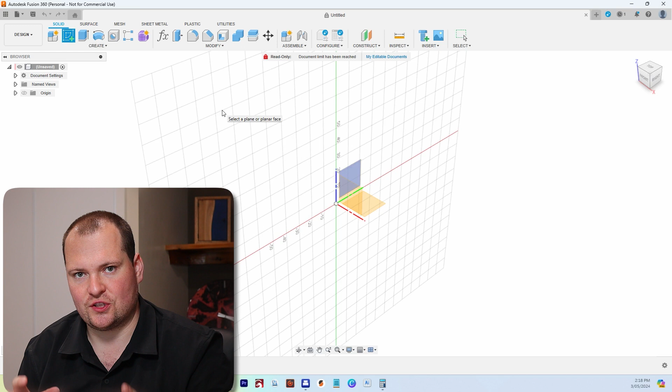Okay, so you're in Fusion and you've got a new workspace open. What you want to do is go up here to create a sketch. I'm going to be going through this relatively quickly if you're not familiar with the basics of Fusion 360. If you want to know more about it, let me know in the comments below and I may do a series on the software itself.

Okay, so new sketch up here and we are going to go on the bottom plane there. So we're drawing from the top, circle. We're creating a circle here and we're going to make this 300 millimeters. So that's our circle there.

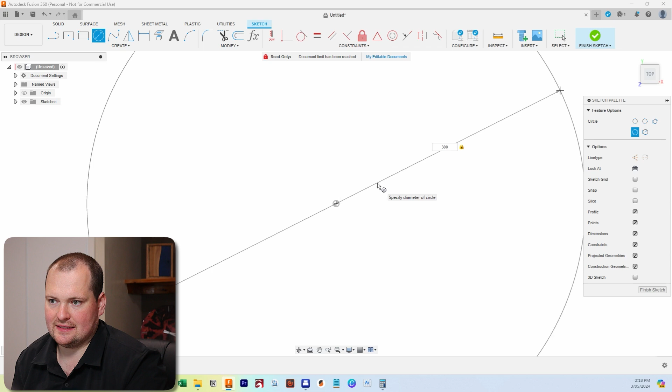Now the next bit of important information is because we're making this to house a ramekin, let me grab a ramekin. An organized individual would have had that ramekin handy, but that's not me, so apologies. The ramekin sits inside said groove. You need to make sure you know what ramekin you're using and how big that ramekin is.

So I'm just going to grab a measuring tape, measure that one up. I'm in an office, so I'm going to use a ruler, but measuring tape works just as well. So we are roughly 90 millimeters. So we're going to make our size 90 millimeters. That is a relatively standard size. So we're going to hit C for circle, and we're going to make that 90 millimeters.

If you don't want to use your keyboard, you can use these up here, but I highly recommend you learn the shortcuts. It speeds up the workflow astronomically.

And now we're going to throw in some offsets. So basically, we've got our inside dimension here and our outside dimension. That's what we've got on the screen there. We need to offset that to give these upstands. So in our case, we're going to go 10 millimeters.

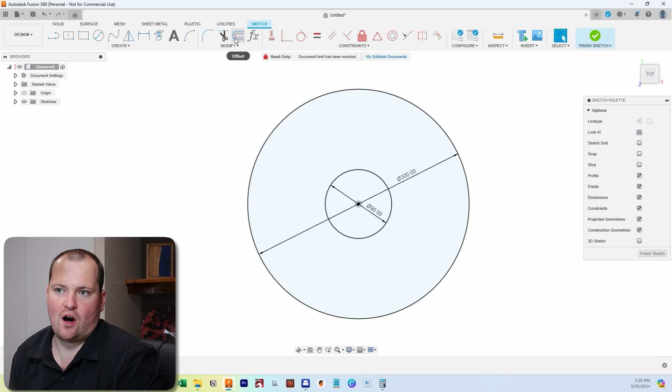So up the top here, you've got this offset tool. Click on that, select your circle. We're going to drag outwards of the center. We're going to make that 10 millimeters. We're going to do the same thing, but we're going to drag inwards of the outside circle. So we're going to need to make that minus 10 millimeters. That gives us our offsets there.

Now, all we need to do is add our dividers. You can do 4, you can do 2, whatever works for you. I'm just going to mimic this and we're going to do the exact same thing. So you're going to put in a line. Now basically we need to put a cross in to then give us our offsets based off that line.

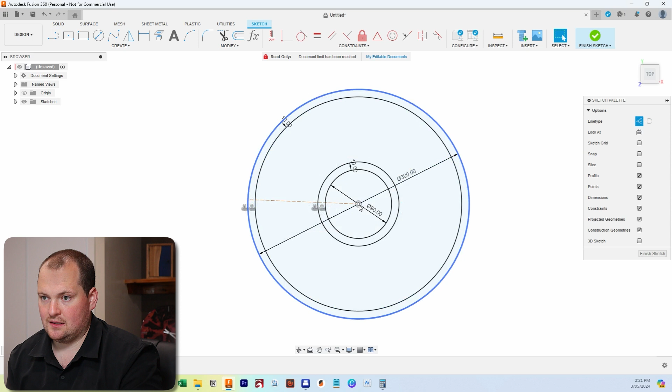In all 4 directions. Now you can see there, I'll zoom in for you. See how our lines we made earlier are solid and these are dotted lines? Those dotted lines just represent the fact that they can't be extruded. They can't be used within the model other than as a reference line.

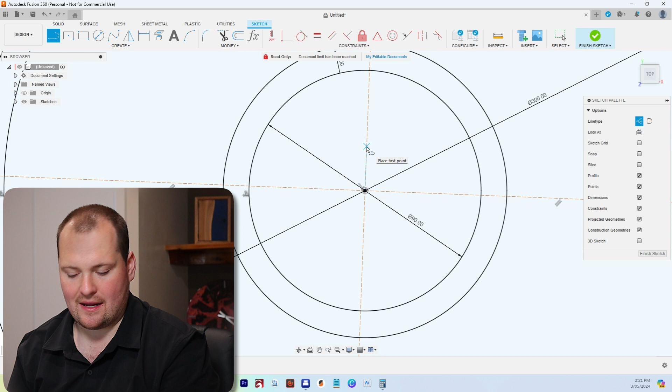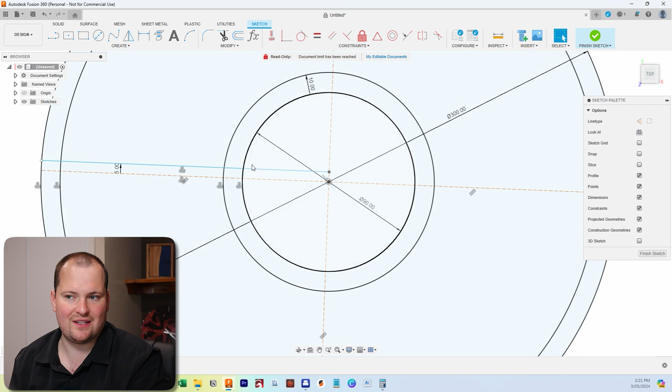So now we're going to push X again, because see here, we're still selected as a construction. If I hit X on the keyboard, it then takes that away. Now when we use our offset tool, back up top, we're going to offset off these 5 millimeters. If you didn't take off construction, that would be a construction line and you wouldn't be able to reference anything off that again. So we're going to do the same thing here.

We are going to offset minus 5, and we're going to do the same to all of the lines we just made.

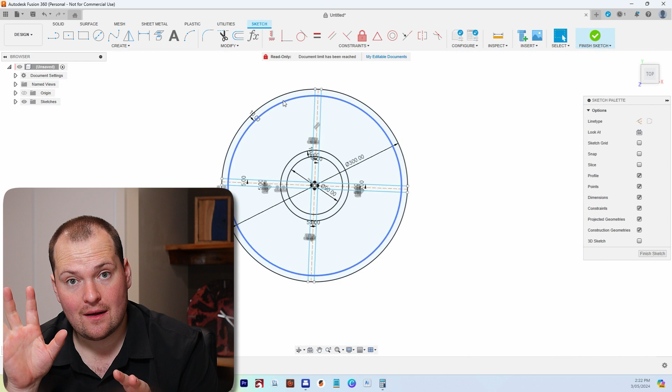Okay, so effectively that there is our sketch. Now this is where you can complicate it as much as you like or make it as easy as you like, depending on what you're trying to achieve. We can now extrude straight off that, or you can go ahead and make all of your fillets, so your rounds in your corners.

But the reality is, when we cut this out... if I can get this bit out without cutting my fingers up. One eternity later, got there.

We're going to use a bowl and tray bit, that's what I know it as. I don't know if that's its technical name. According to Timbecon, it is a DC-318H bit, but bowl and tray bit - so effectively this gets used for bowls and trays. Fancy that. But you can see that the corners are rounded and the edges are rounded.

So naturally, when we set up the G-code based off this bit, it will automatically do all of that in the software itself. The only reason you would need to do it in the software currently is if you wanted to see what it's gonna look like. So you can take the time, it's gonna add a bit of work to your workflow, or you can just punch it out based on that.

So in this case, we're just going off that because we just want to show you how to actually achieve one of these bad boys. Okay, so we're gonna now click up Finish Sketch, and then you now have everything to work with. So we're gonna extrude this, extrude.

So we want to select it all. We're working with 20 mil thick timber. We're gonna make a 10 mil base and then 10 mil cutout. So from that, we're gonna extrude down 10 millimeters and up 10 millimeters, so minus 10, that gets us our solid base. So there is our base.

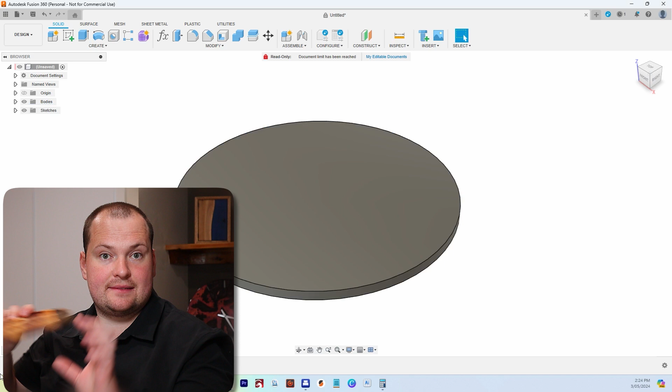Now, whoops, knocking stuff over left, right, and center here. So we want to turn that sketch back on so we can see it again.

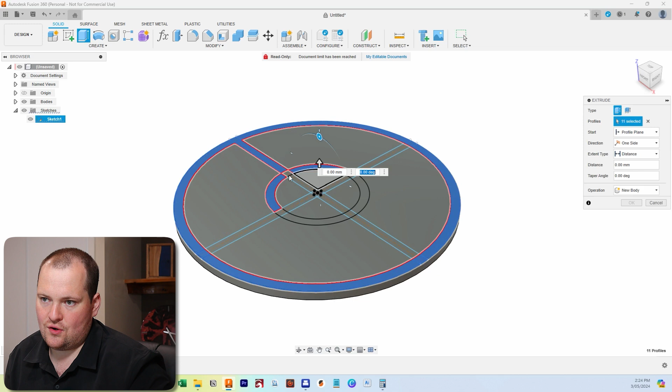Now, hit E, extrude. So we're going to then pull up everything we want to be pulled up. So we're just going around and selecting all of the bits and pieces. And we're not - whoops, that one we don't want. I'm not doing a very good job of this.

Okay, notice here, I'm just going to zoom in for your knowledge here. That's where that construction line is. I can't select either side of that line. That's what the construction line's for, it's just a reference point. Can't use it when you're actually modeling in.

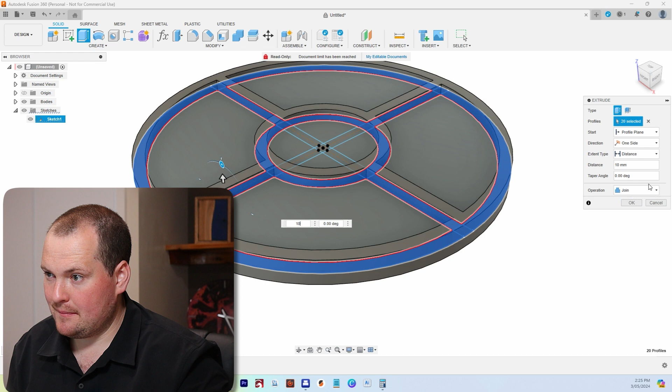Okay, so we are then gonna pull this up 10 millimeters, and then we wanna make sure the operation is join over here. I believe that's the default - might be different for everyone, but join is what you're wanting. And then we can turn off all of our sketches.

Bang. Now, theoretically, we have a 20 mil high wall here, 10 mil step down, 10 mil step down, 10 mil step down there. Again, you could go through and throw a fillet on the inside to represent what you're actually gonna have, but not required - it's gonna naturally do it anyway.

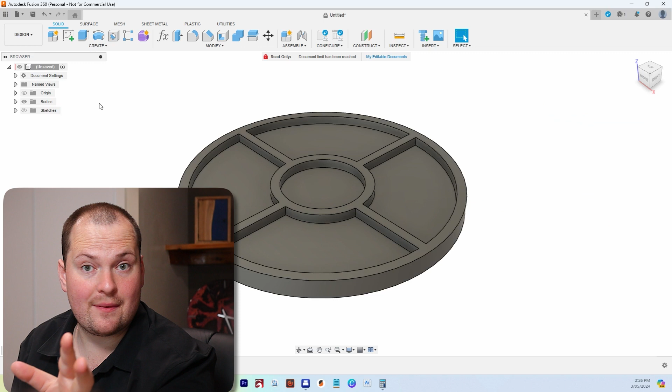And there we have it, the tray is made. That is exactly what you need to then go ahead and cut one of these bad boys out. We can jump straight into making the G-code based off this, which we'll do in a second.

But I'm gonna quickly open up one that I have made and show you what a tray could look like if you took the time to color the tray, put in your fillets, all your roundovers, everything like that, so you can see what a finished product would look like.

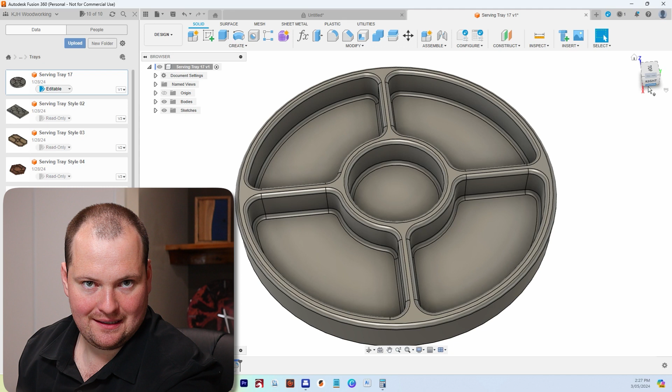You go, I don't have it colored, but this would give you an idea of what it's gonna look like if you went through, put on your roundovers, because we're gonna round it over naturally, and whatnot. And then I haven't actually got a fillet in there, but if you put in a 3 mil fillet on all of these, that's gonna give you a good indication of what it's gonna look like. But you do not require to do that for actually making it - you can simply use what we're going to use, the stock standard base shape.

You're gonna go ahead and save the model in case it crashes, so we don't have to do that again. You can save it wherever you like, but I suggest making some form of orderly saving system. I'm gonna create a new project and call it YouTube videos, otherwise I'm gonna get really confused really quickly.

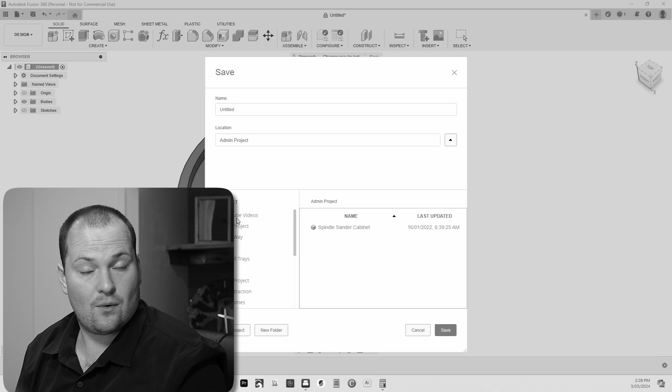So we've been doing this in the design space. See up here where it says design, you can change your workspace to manufacture. This is where we go and make the G-code for the CNC, which effectively is the code that runs the machine. A few things you're gonna need to have set up is your machine within the software. We're not gonna do that today.

A few things you need to have set up is the CNC machine that you're using in the software. You need to set that up. I've already done that for my machine, so we're not gonna be doing that today. But if you want more information like that, check out the playlist down below, it's all things CNC, runs you through everything. And if you want more specific information, feel free to ask. More than happy to assist and impart some knowledge where I can.

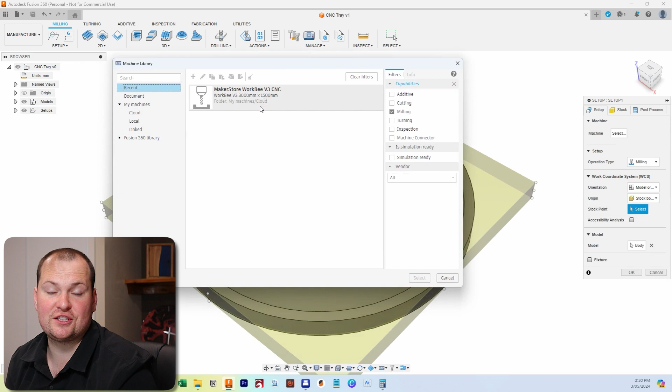Okay, so first thing we're gonna do is create a new setup. The setup is effectively setting up the stock and selecting your machine. So we're gonna select our machine over here, I'll drag that over so you can see what I'm actually doing. We're using a MakerStore WorkBee version 3 CNC, so logically that's what I called it. Really creative - I could have called it my CNC because I only own one.

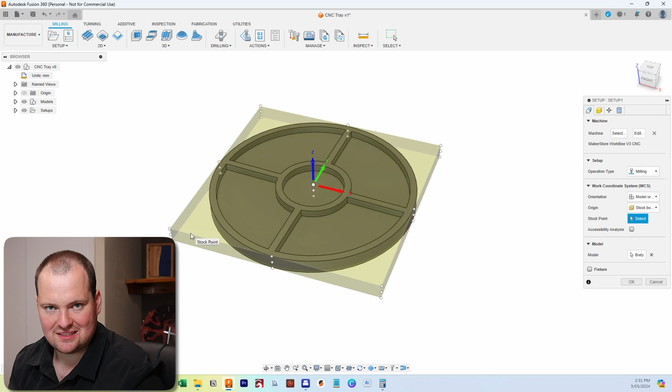See how the axis is set in the center? That's not how I operate my CNC. I always set mine up as the top left point because I have a workbench where I can butt everything into, and it's like a reference point. It makes it really easy for me to set things up, but you can work with what you've got. So I'm gonna select my stock point as that corner.

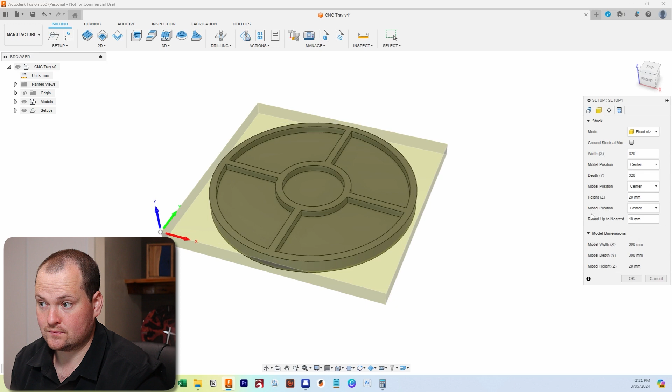Then up the top, we're gonna go across to stock. You've got a couple of options here: you can make it a fixed size, so measure the piece of timber you're using, or make it relative to the model you're using. I am gonna use a fixed size because I know the timber I'm using is 320 by 320, 20 mil tall. So that's the size timber I'm working with, so if I plug that in, it's always going to be correct. But you could make it 20 mil bigger than the model you've made - up to you how you want to work it. And then we're just going to hit OK, and that is our stock setup.

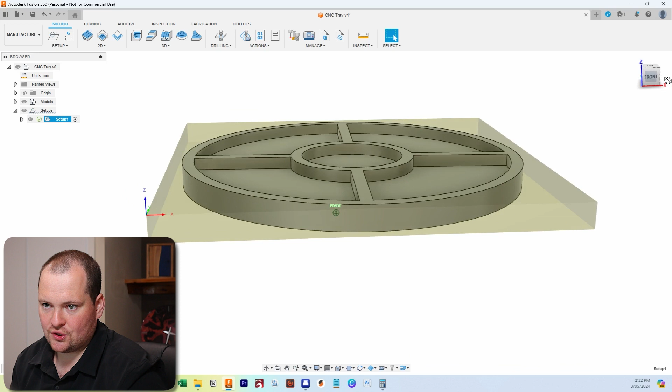So the stock is represented by this yellow shaded bit here, which shows you what is actually getting cut out. Now we're going to go ahead and make our cuts, so we're going to use two bits here: a cutting bit and then the bowl and tray bit, which we had right here. The one we're actually using in the CNC has a smaller shaft - I just ordered this one first and realized it doesn't fit in my machine, so I had to order another one. Live and learn, make sure you buy bits that fit your machine.

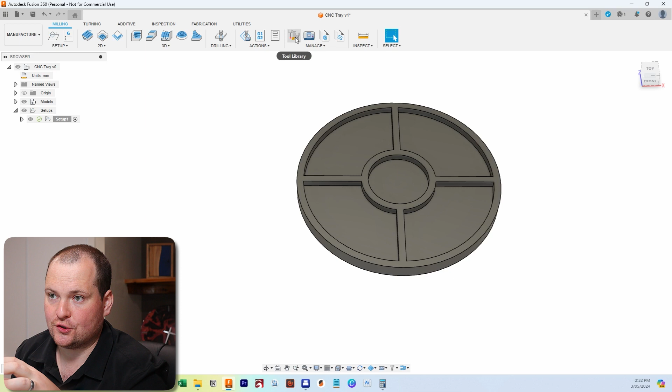So we're going to have to go and add those bits in. We want to go over to manage your tool library, and again I'm going to drag that over so you can see what I'm doing. They are both Torquata bits. As you can see, I've added some of those bits in here, but we'll show you how to add a new bit, so we're going to go new tool.

We're going to select the type of tool. So I am using - I'm so going to slice my fingers up doing this.

Timbecon, can you make these easier? Easier to get out of the damn boxes. They're really well packaged. I'll be back. Need pliers. I'm back with pliers. Now you're using pliers to get it out. Don't grab the blade.

Hey. So, we are going to set up this bad boy here. A couple of ways you can do this. Depending on the bits you've bought, you may be able to find all of the information online. Some companies will actually have a CNC downloadable file that you can plug straight into Fusion. Other companies don't, but it's really easy to set them up.

I'm going to use a really accurate wooden ruler because that's what I've got in here. I would highly suggest you use calipers to get as accurate as possible, because the reality is once you've set up this bit, if you buy the same bit every time, you don't have to set this up again, you just select the bit. So we're going to jump on Timbecon's website and we're going to do a little search for this bit. So you got the bit number there.

Oops. Can you see that? Yeah, my gosh.

So I can search for that bit. So we're just going to go SCD-064-Q-3-F. And here we have it here. So we're now going to look down here to find the one we're looking for. SCD-64Q. So this is this bad boy here. So we now have all of the information we need. We have the shank size, cutters, the cut direction, cut diameter, cut height, overall length. So we can go through and plug all of that information straight into Fusion.

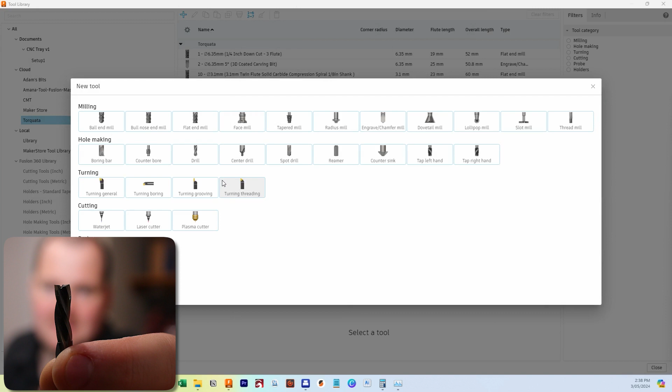So we're gonna select, it's a flat end mill. As you can see there, the end is flat. So flat end mill. So we're gonna select that. Description. Logically, call it something so you know what it is called when you go to buy it again. Then you put in the vendor. I bought mine from Timbecon.

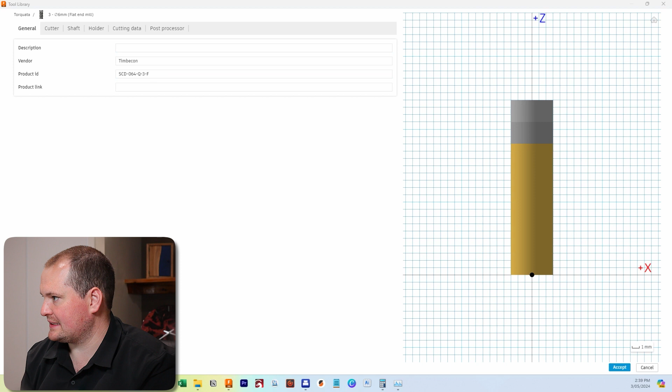So I put that in the wrong field. Good thing I copied that. So I should have put in the top section this bit of information, which is straight copied and pasted from the Timbecon website. And then I'm gonna go ahead and delete and rename to what my actual bit is. So mine is the 1/4 inch, so I'm getting rid of the 1/2 inch shank. It's triple flute. All that is still the same.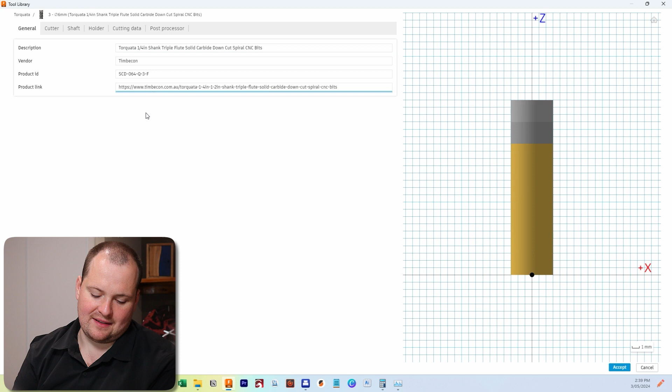And then we are gonna copy and paste the product link, because the reality is bits wear out over time. Sometimes you snap them. You wanna know at a quick reference, when you buy another one, how do you get it? I don't wanna have to think about this. I just wanna get it done. We're gonna go over to cutter. Plug in the information. We're working in millimeters. If you're in America, you will not be working in millimeters, but I am. I'm in Australia, so I'm working in millimeters.

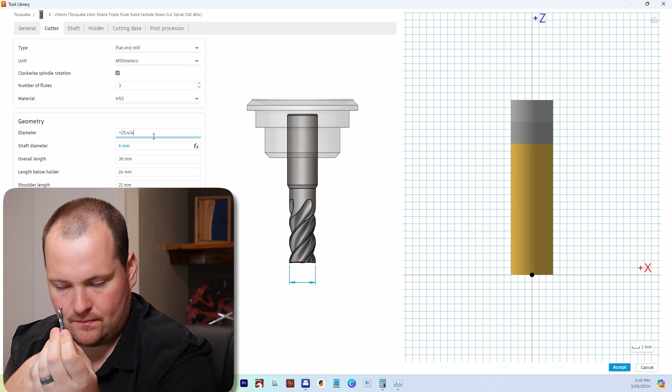So other cool thing about this is Fusion basically does maths for you. So I'm not gonna go and work out and put in what a 1/4 inch is. I'm just gonna go equals 25.4 divided by 4. So an inch is 25.4. If you work on 25, you're wrong. In reality, 0.4 millimeters doesn't matter, but in the CNC world, 0.4 millimeters matters. Because if you make this 25 divided by 4, a lot of people, particularly people that aren't in the woodworking realm, and a lot of beginners will go, oh, an inch is 25 millimeters.

It's 25.4 millimeters. Issue with that is if you went 25 millimeters, say this bit cuts up and back 100 times through this here, okay? Up and back 100 times. If you're 0.4 millimeters out, all of a sudden you're 0.4 times 100. Let's do some maths. There's 40 millimeters. There's that much out by the time it's finished. 0.4 millimeters matters in the CNC world.

Overall length is 52 millimeters. If I had read down a little bit, it said 6.35 millimeters on the Timbecon website. Here, I'll show you. Right there.

Just wanted to make it interesting for you guys. Keep you engaged. I'm trying here.

Length below the holder. Other cool thing is that on the actual page in Fusion, it actually shows you what you're measuring. So if we've got the overall, that's the entire length of the bit. The shoulder length, the flute length, just the bit that cuts. So the cutting height in this case is 19 millimeters. So we'll put that in as 19 millimeters.

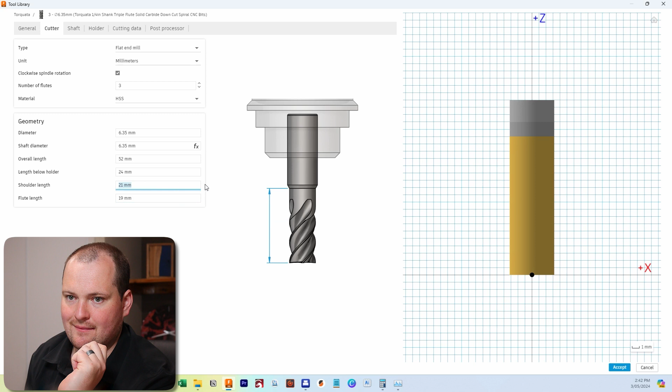Shoulder length is to the top edge of the cutter, which is 30 millimeters. Managed with my high-tech ruler here. And then under the shoulder, I'm gonna allow about 5 millimeters in there. This distance here will be about 5 millimeters, which will give me 17 millimeters inside my CNC, which is plenty.

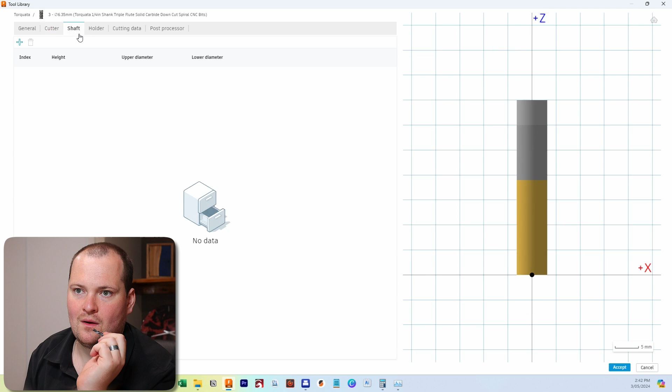We're then gonna go across to cutting data. Cutting data is the biggest thing here. Now, I cannot stress this enough. If you take one thing away from this video, make it this next comment. Cutting information is vital. It changes depending on your machine, what timber you're using.

So you're gonna need to play around. You're gonna need to tweak the settings. So basically, I have this bit entered in here 6 or 7 different times. I have this bit entered in here for a hardwood, for an MDF, for an acrylic, so that I go, that's the material I'm using. I've worked out by trial and error, and I say trial and error because I have snapped numerous bits. I have blunted numerous bits. So you just have to play around with your settings.

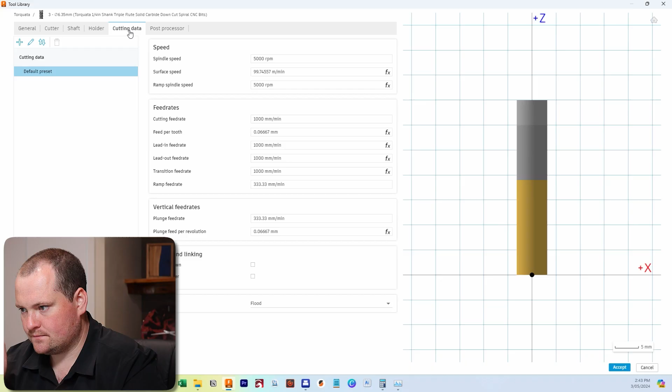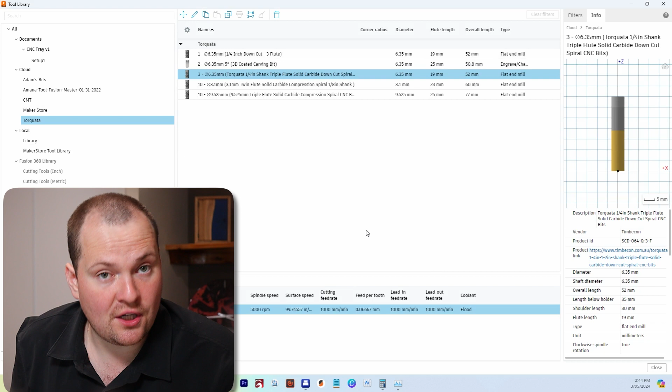It's always gonna change depending on what CNC you've got. So I'm not even gonna touch this, because that is so different for everyone. All I'm gonna say is you're wanting to test it out. And then post-processor, you just give that a number and hit accept. And there we go, we've added this bit in. And then you do the same thing for your other bowl and tray bit. But I'm not gonna do that because I've shown you how to do it. You do the exact same thing. Follow the exact same process.

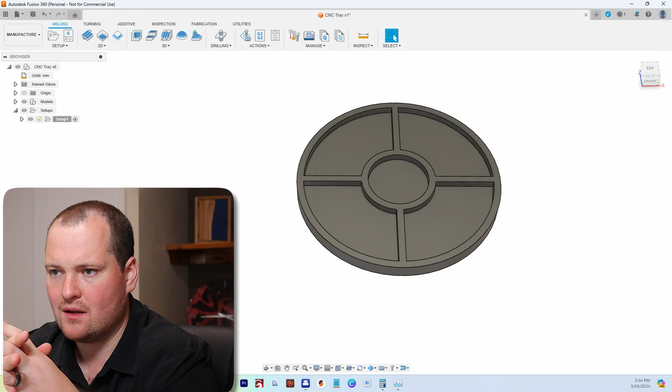Okay, so now we are gonna add our paths. So the path is effectively where the bit's gonna move. Now, one thing you want to keep in mind and consider is what's gonna happen when you make your cuts. If we cut out the outside first, brilliant, that's gonna work really well until it starts to move as we're throwing in our big bit. So we wanna do pockets first, followed by our contours.

Other thing you can consider doing is, these bad boys are expensive. These ones are less expensive. You could carve out the bulk of the waste, so the majority of the waste, and then just tidy it up with this one here. But that all depends on what you're trying to achieve. If you want to save money on the bits, great way to do it. If you want to do it as efficiently as possible, using one of these might be the better option. So you just got to play around, work out what's best for you.

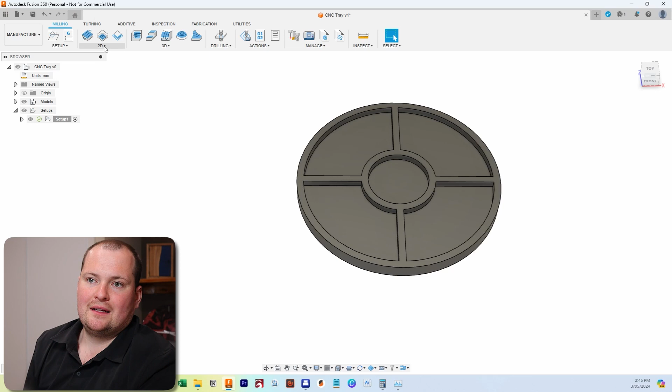Okay, so we are doing 2D carving. So we're going to click here. We want a 2D pocket. We're going to select our bits and pieces there that we are going to be carving in. So effectively, we have just selected these bad boys here. We're then going to go over here to the tool. We're going to select the appropriate tool.

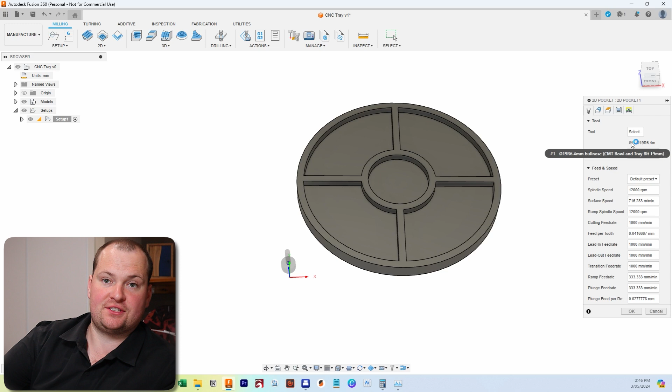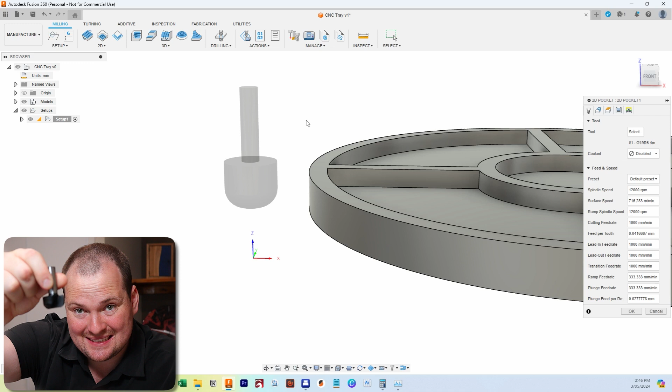Okay, so we've gone ahead and selected the appropriate tool, which is this one here for our bowl and tray bit. If I show you the little bit here, you can see how the visual image, it's not working for me. The visual image reflects something similar to this one. The tool I've selected, because I haven't added this specific bit in, doesn't have as wide of a flat bottom, so I would have to amend that if I was actually going to use this exact bit, but it doesn't fit in my machine, so I'm not adding it because I'll use this for a handheld router.

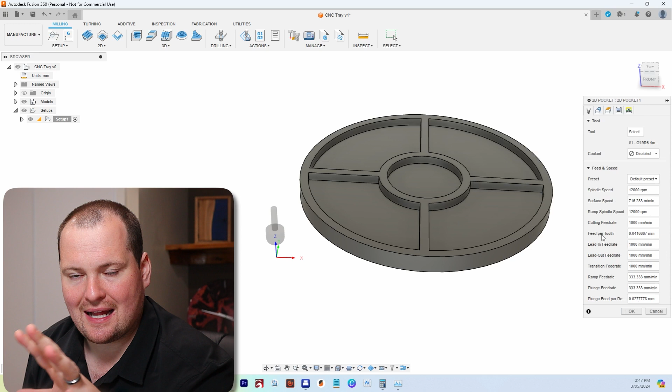So I've selected that. All of the feeds and speeds automatically preset based on the tool you used. If you wanted to tweak these for a specific project, you can do that here, still keeping your default parameters for your actual bit. So we've already selected what we're going to be cutting. Heights. So we want to go to the selected contour as the bottom height, which is where we're cutting there. So that is all preset based on your machine and how you've set your model up.

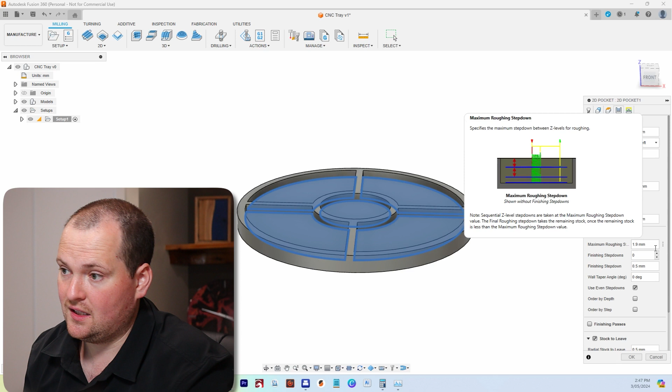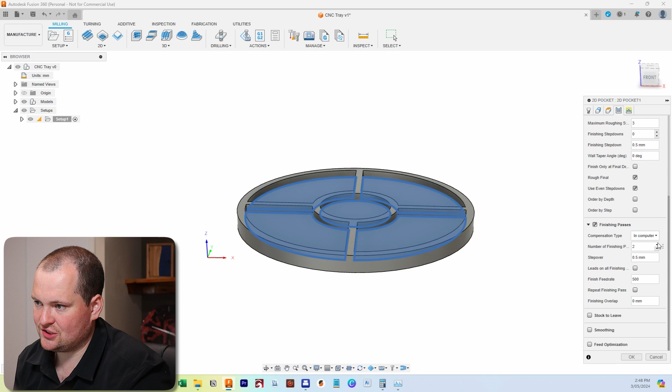Okay, this is where things get interesting. So what we're wanting to do is add multiple passes because I don't want to burn out my machine. I've got a hobbyist machine. So we're gonna make the maximum roughing depth 3 millimeters. We're gonna use even step downs, and we're gonna use a finishing pass down the bottom. We're gonna slow the finishing pass down, and we're not gonna leave any stock. We're actually gonna do 2 finishing passes there, and then linking, again, all preset based on your setup of your machine. So we're gonna hit OK there.

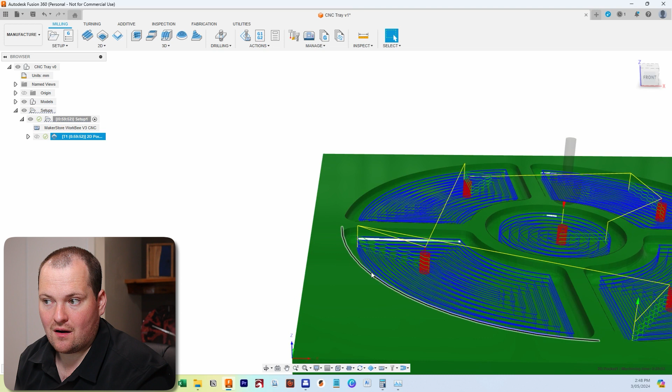We're gonna see, this is a really good example here. See here, we've got the natural fillet. We didn't design that in, we didn't draw that in, but we've got that there because that's what the bit's naturally gonna do. That's why you don't have to spend your time in the software, wasting your time. Time is valuable.

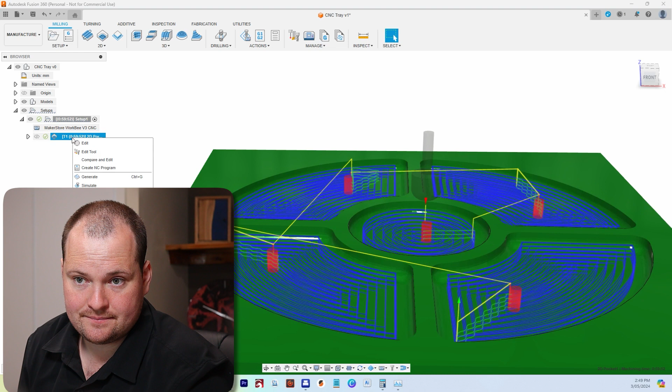Understand this is everyone's hobby, or I would say 90% of the people that watch this channel's hobby. So you don't wanna waste your time playing around in the software if you don't need to. And then what we're gonna do here is right click here, and we're gonna go simulate, just to double check we've got everything correct. So we're gonna hit the play, try to slow it down.

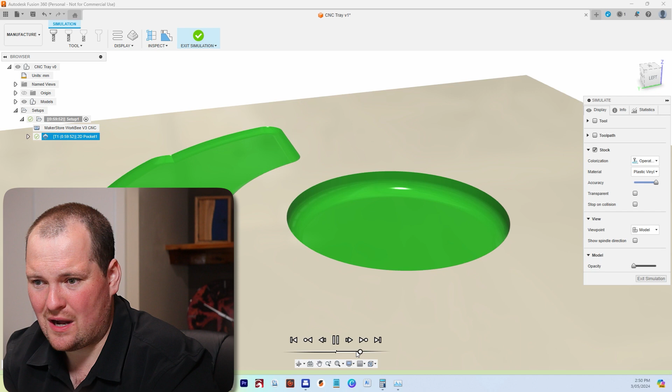One eternity later. Okay, now we're getting somewhere. So now you can see here, it is actually gonna map out the exact path it is gonna take. So what I would suggest is let that run through, make sure you're happy with everything, because it's a lot easier to fix an error on a computer than it is on timber.

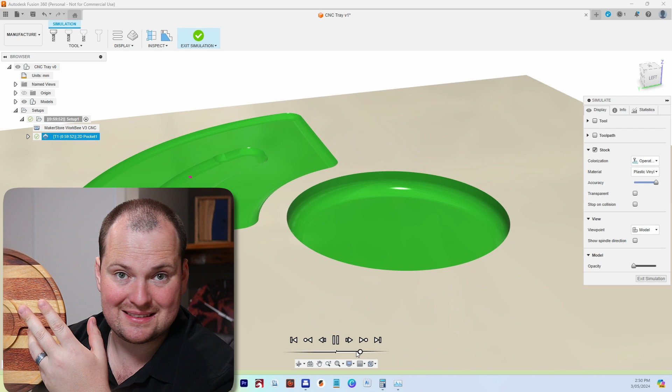If you realize after the fact that you've selected the wrong section and you've cut it out, you've wasted your timber. If you don't know where your clamps or your hold downs are gonna be, and it hits a clamp or hold down, you've wasted a clamp, you've wasted time, you've wasted timber. So you wanna take the time to run the simulation and make sure it is on point with what you're trying to achieve. But I'm not gonna waste your time watching this, so we're gonna skip over this. So now we've got our pocketings done.

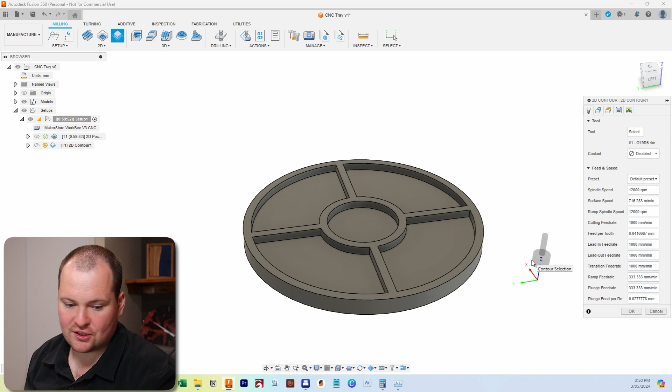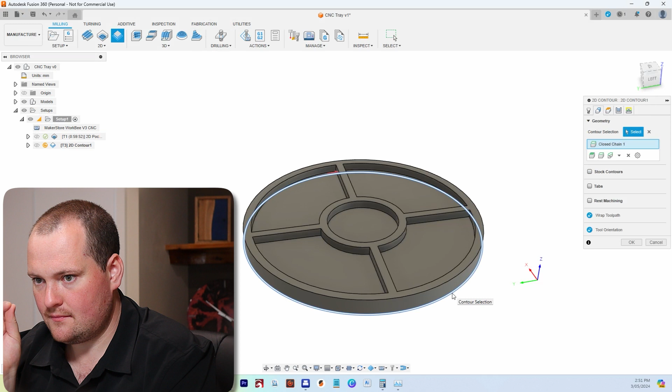Now, there's a few ways you can do this next step. Tabs are effectively little bits of timber that will hold your piece in place. If you hover over that, you can see on there there's 4 tabs. Effectively you're gonna be clamping the outside perimeter. This bad boy was originally a square, so you're gonna clamp these sections down to hold it in place, and the tabs will keep this from moving as it's being cut out.

A couple of ways you can do it. You can get rid of the tabs and you can double-sided tape this down onto your bench. Other options is you can have a vacuum table, like I'm gonna show you how to build in a couple of upcoming videos.

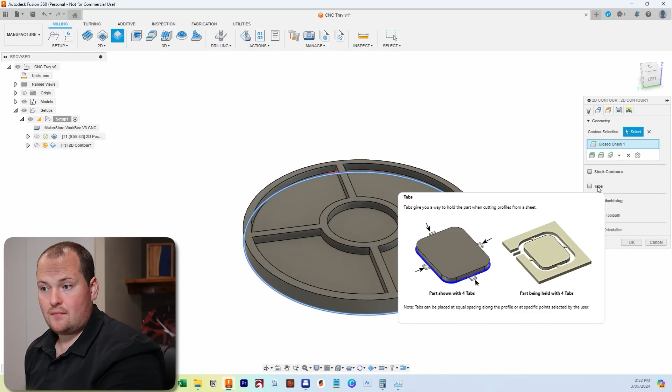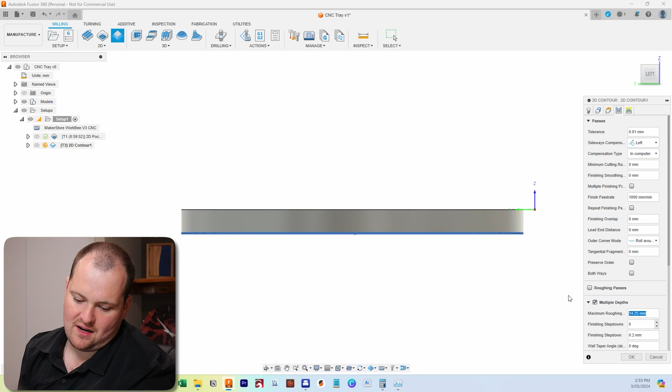So tabs, in my case, I'm not gonna put tabs in there. I'm gonna go across here to heights, and instead of being 0 millimeter offset from the bottom edge, I'm gonna make that -1. What that will do is bring the offset up 1 millimeter, leaving a thin amount around the outside. Again, we're gonna do multiple depths. With this bit, I'm probably gonna go 4 millimeter maximum depth. Again, this is gonna be different for everyone's CNC. Do what works for you. You can increase the speed of the machine and do shallower passes, or you can do deeper passes and slow the machine down. It all depends on your particular machine.

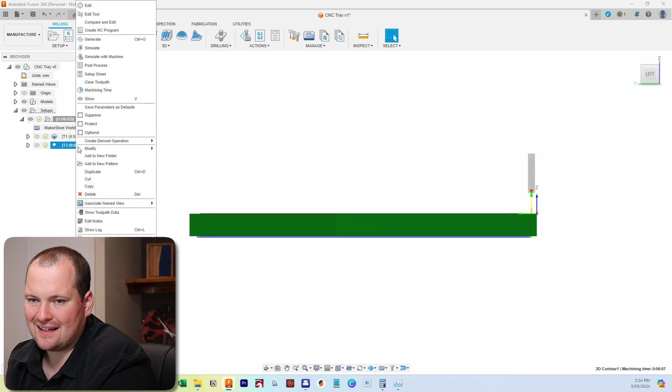So we're gonna hit OK, bugger that up. I should have gone a 1 millimeter offset. So we're gonna go here, edit, over to the height. We wanna bring it up 1 millimeter, not -1 down. Yep, laugh at me later.

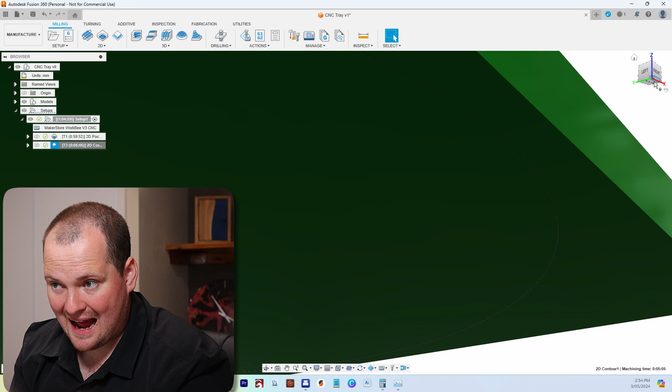And now you can see that it's gonna cut down, but it doesn't cut all the way through. So that allows me to use my vacuum clamp, suck it down to the table, and then I can use my round over to take care of that. Okay, so we've got our G-code. Again, I would run a simulation, just check that I'm happy with everything there. It all looks very nice from up top.

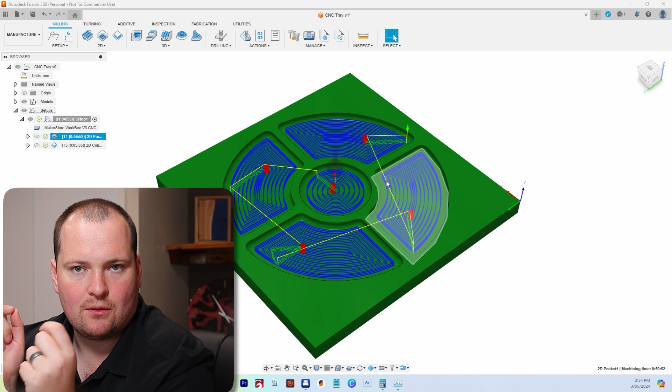So I would be happy with that. So now what we need to do is export it. I don't pay for Fusion, I use the free version, so I have to export them in 2 separate files. So one I would call, I'll show you. So we're gonna right click, we're gonna go down here and we are gonna go post-process. Again, I'll drag it on so you can see this.

That's my machine, that's my post-process. I'm gonna call this test tray. And then what I do is I then tell myself what bit I'm using. So I'm using the Torcata, yep, that is spelled correct, bowl and tray for my first pass. So I'm gonna hit OK.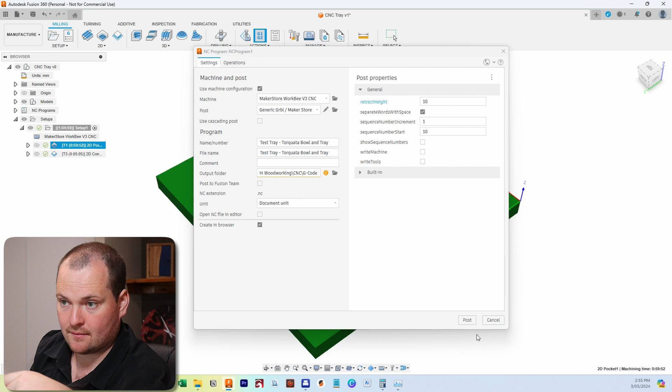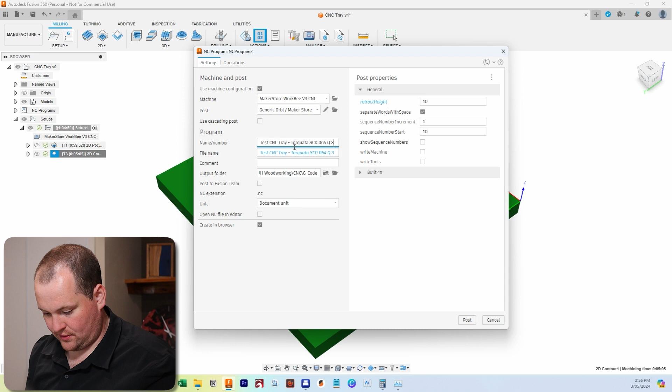And then on the second pass, we're gonna go here, we are gonna go, whoops, post-processing again. This one we're gonna go, so test CNC tray. And again, we're using the Torquata SCD 064 Q3F. So then when I get out to my shed, because this is not in my shed, this is not in my workshop. I don't know if you realize this is an office space.

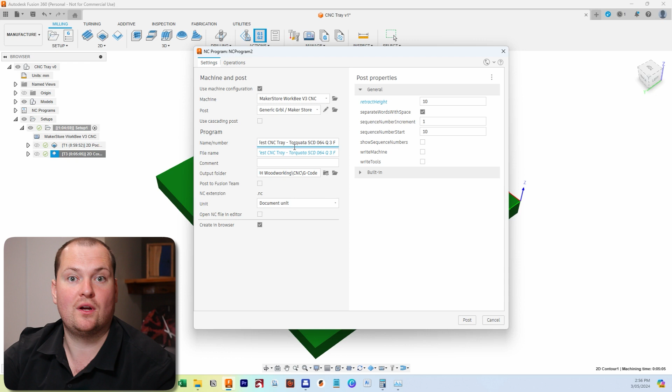So when we go out to the shed, I don't have to go, oh, what was what? I'm not getting confused. I just go, okay, pick up that bit, pick up this bit, all labeled. Everything is crystal clean when I throw it into my software to run my CNC. So then we would hit post and bang, we now have our G-code to throw into our machine, ready to rock and roll.

So you've just seen the complicated way of batching out one of these trays. You can make these as complicated or as simple as you like. So there are hundreds of different ways you can make this, probably thousands, depending on what you want to do. The easy way, now I'll show you the easy way.

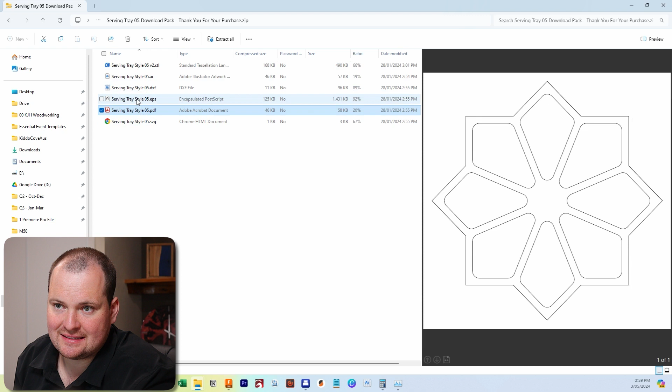So all you do is go over to Fusion, you're gonna go insert up here. We're gonna insert a DXF file. We're gonna pop that on the bottom edge. We're gonna open up our file. So I've then gone and selected my file and bang, job done. There's your design there and you can go straight into extruding it just like we did before. And you don't have to take the time to make measurements, work out what you want to do.

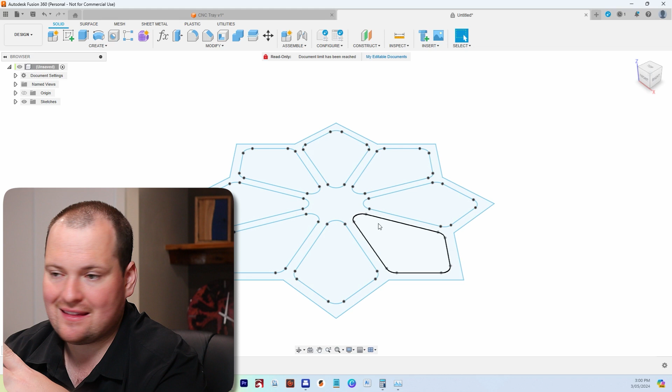Or you can go through the first method and design your own, whatever suits you guys. I hope this tutorial has helped you gain an insight into how to design it. We're not actually gonna batch these out yet.